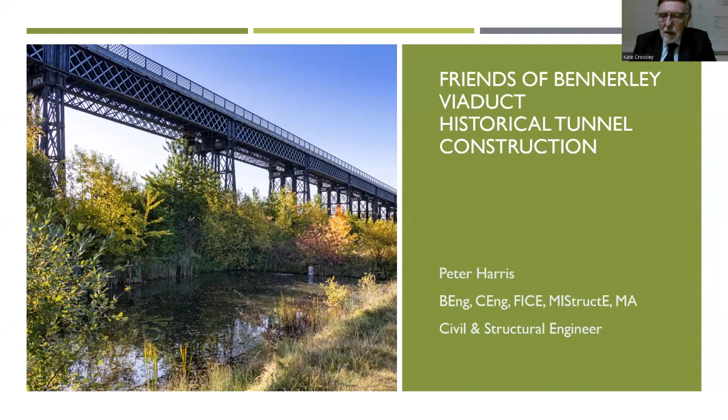What I was going to talk about tonight is historical tunnel construction. Basically, how tunnels were built in that period from about 1780 with the canals right through to about 1890. And the topics I'm going to cover are how they sank the shafts, how they constructed headings between the shafts and along the line of the tunnel, then how they constructed the main tunnel itself, and finally talk about some construction features.

The sources I've used in putting this together are Frederick Simms' Practical Tunnelling, written in 1845 and then upgraded in the third edition 1896, and that's where most of the illustrations that I'm going to use tonight come from. I'm also going to make reference to a couple of comments by Charles Gripper in his Railway Tunnelling in Heavy Ground, written in 1879, just after these tunnels were completed.

And also a couple of references to Thomas Walker, who built the Severn Tunnel, its construction and difficulties, 1872 to 1887. And I'll also be using some references from the Forgotten Relics website run by my friend Graham Bickerdike.

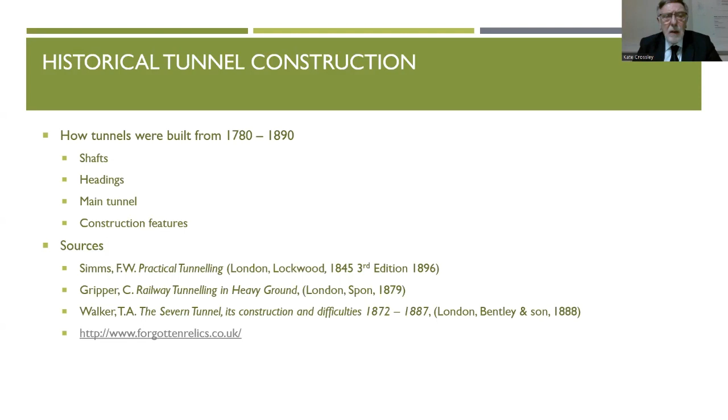So firstly, let's have a little bit of a general overview about the line in general. The Derbyshire and Staffordshire Extension Railway, which ran from Egginton Junction through Etwall, Mickleover, into Derby Friargate, and then out again through Breadsall, West Hallam, Ilkeston, Bennerley Viaduct, through Kimberley, and eventually on to Gedling and Nottingham

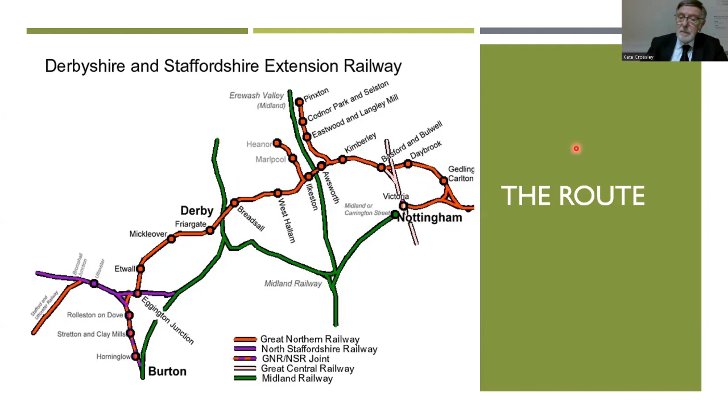itself. And there are 4 tunnels on the line, one at Mickleover, which we'll talk about, one at Morley, just the other side of Breadsall, Watnall Tunnel near Kimberley, and finally the big tunnel at Gedling, the Mapperley Tunnel. I'm going to use those initially as illustrations for some of the things that we're going to talk about.

Firstly, Morley Tunnel, very short tunnel. It's only 238 yards long. Picture on the right shows it before it was infilled. It's now completely buried, although the Greenway cycle track, which will eventually connect to Bennerley Viaduct, does run over the tunnel. It's a very short tunnel, 238 yards. So you could theoretically and almost certainly drive this from the 2 ends.

That would enable you to have basically 1 shift of miners to do the excavation and 1 shift of bricklayers to lay the bricks to form the tunnel, and they would alternate from one end to the other. You just have two faces, 1 at each end. So that would be a very simple tunnel to construct.

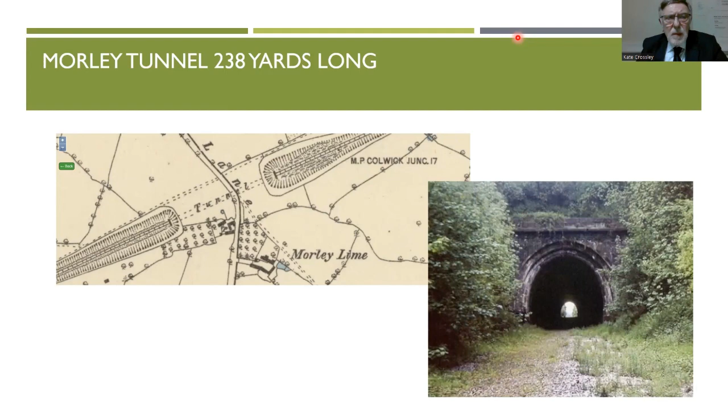Then if we look at Watnall, Watnall is slightly longer, just 288 yards. The picture on the right again shows it in its very deep rock cutting. You can see that both in the plan. This is the 1880 Ordnance Survey plan showing the rock cut in each side. And the tunnel again, sadly, has now been infilled. And again, at 288 yards, it's on the limit of the sort of thing where you'd want to build it working in from the 2 ends with just 2 faces.

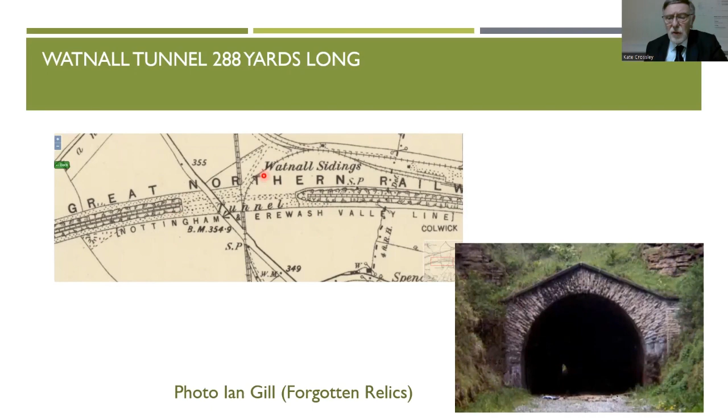But the next one is the big one, Mapperley Tunnel, 1,132 yards long. At that, it's the 22nd longest tunnel in Britain. There are roughly 700 abandoned tunnels and roughly 700 tunnels still in use. So this was built with 6 shafts. In order to build a tunnel economically, once it's over about 200 to 300 yards long, you need to have more faces. Now this one had originally 6 shafts. 3 of these have been filled in and 3 of them are left open.

And we can see the open ones here. If you can see where my laser pointer is, there's an air shaft. That's one of the construction shafts. That's another one, and that's another. And there were 3 others. Now, where those 3 are isn't quite clear, but if you look around the shaft, you can see these mounds. This is the spoil which was excavated from the tunnel, which was just deposited as close as possible to the shaft. So there's a mound just there. So I suspect there was another shaft there.

There's a mounded area just behind the portal here. So I think there'll be another shaft there and possibly another one in the middle of that field. 6 shafts. So 3 of them have been filled in, 3 left open. That would enable you to have 14 faces to work from, and then you'd have in effect 7 teams of miners excavating at one end, 7 teams of bricklayers working at the other, and they would alternate from one position to another, and that would be the economic way of building a tunnel as long as this.

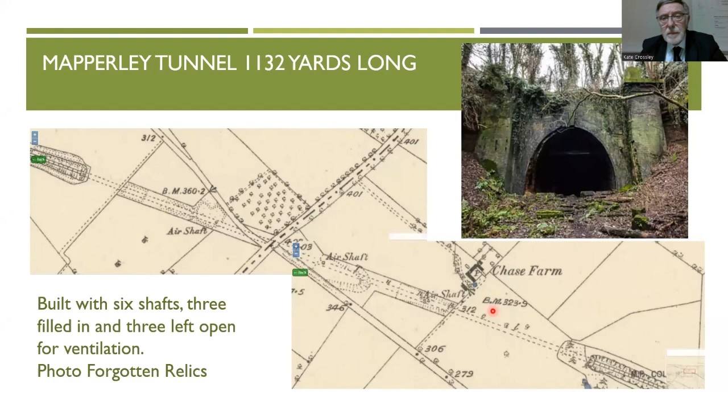Interestingly, the next one is Mickleover Tunnel, which is a bit odd because it's 464 yards long, which is too long to build without shafts. And yet here we see on the 1880 map, just literally 2 years after the tunnel was built, you've got the cutting at one end, the cutting at the other, and the curved tunnel. That in itself presents some engineering challenges to build a tunnel on a curve. And there's no sign of any shafts whatsoever. For a tunnel this long, I would expect at least one, possibly two.

So I consulted my friend Graham Bickerdike, and he came up with the newspaper report. So there was at least one shaft. We don't know where it is. I suspect it was probably in the middle. And although there's no spoil mound there to show where the waste was tipped, it may well be that the landowner who arranged for access to this probably insisted that all the waste was moved, or indeed perhaps the waste was taken away and used as part of all the works on the line. However, we do know there was at least one shaft.

And the sad reason we know that is because on the 6th of December 1878, Thomas Smith, one of the labourers, came up the shaft at 6 p.m., which would be in the dark, got to the top of the shaft and was ready to go home, and unfortunately he misstepped and fell down the shaft, broke both legs, broke his back, and sadly died in hospital 8 days later.

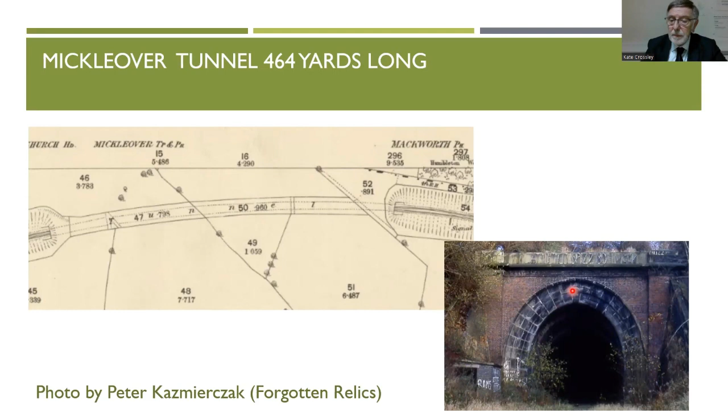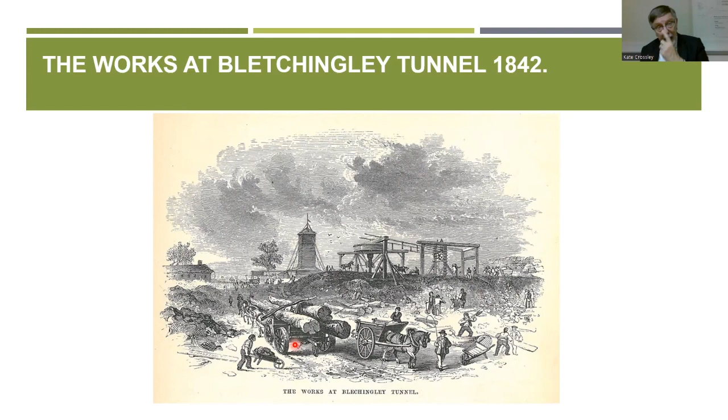In the centre there is this timber tower, and that's a sighting tower, and we'll talk about that in a few minutes. That was used to set out the line of the tunnel. And in the foreground, there is this horse and cart with 3 enormous tree trunks on it. And again, they're timbers that are going to be used in the construction of the tunnel, and we'll be talking about them as we go along.

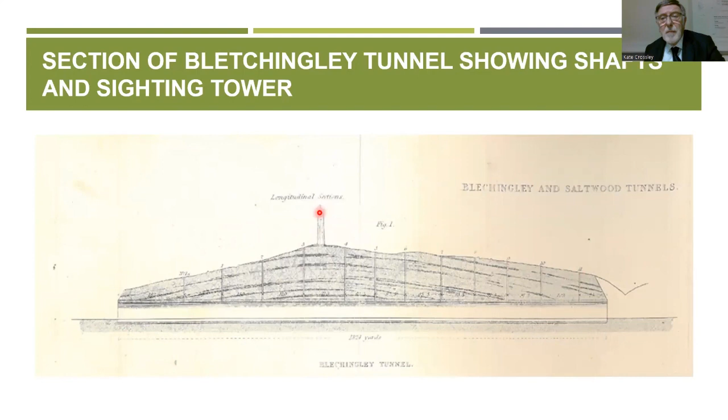So, as I said earlier, you could construct a tunnel from two ends. You'd have 2 working faces, one being excavated and one being bricked up. Okay for short tunnels. This is Bletchingley Tunnel, and this has 12 shafts. So theoretically, you'd get 26 working faces, and you'd have 13 sets of miners and 13 sets of bricklayers to make this economical. On the top there, you can see the sighting tower, and we'll look at how that works.

So a sighting tower usually is a timber construction around a brick or stone core for stability, and the timber structure is to keep the wind off the instrument. In the top of the tower there's an instrument called a theodolite. This one, it can rotate. It's a fixed type of theodolite. It can rotate through 180 degrees and turn over. The photograph there is one in the Science Museum in London.

On the right-hand side, the photograph there is a stone masonry sighting tower. It's the only one of its kind that we know of in existence. This is at Bramhope Tunnel up in Yorkshire. And again, you can see the large slot in the top of the tower through which the theodolite would be rotating.

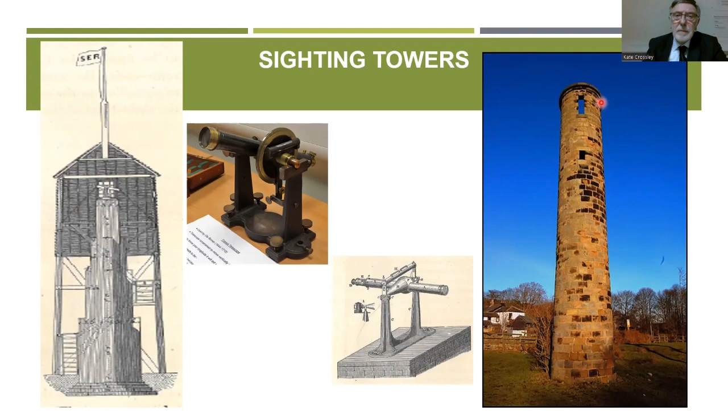So from the sighting tower, you would look firstly in one direction along the line of the tunnel, along the line of where the railway was going to be, and then you would look the other way by rotating the theodolite through 180 degrees. But then you would also be able to sight downwards intermittently to other places on the ground, and you would be able to decide exactly where the shafts needed to be in order to set the tunnel out.

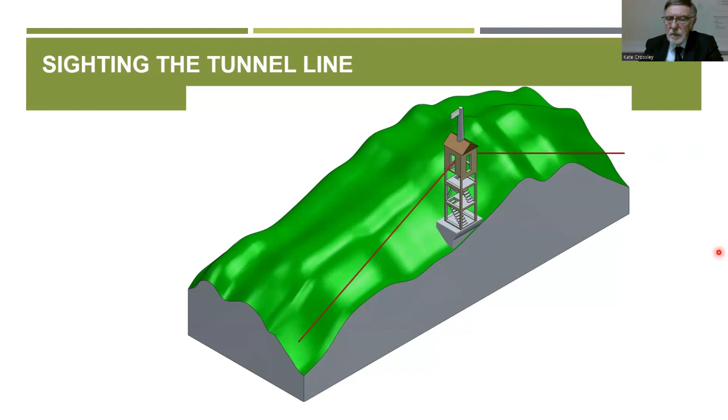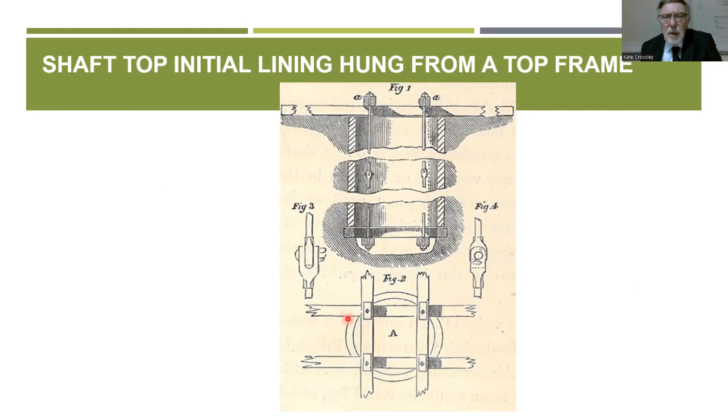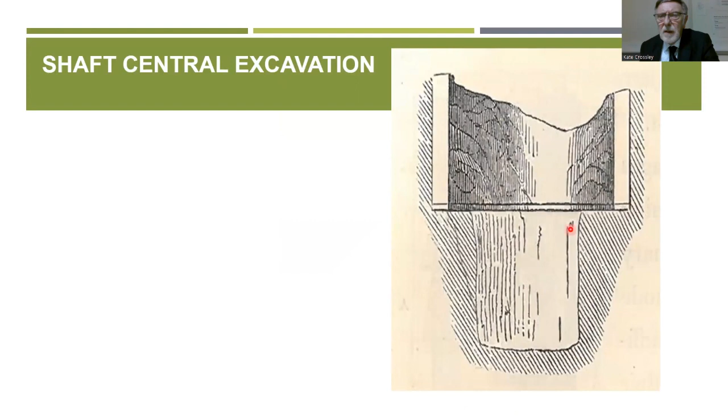Each time you excavated down, you would put the timber crib at the bottom and build the brickwork back up, progressively getting deeper and deeper. In this illustration here, you can see the brickwork's been completed. There's a timber crib in place, and they're excavating down the middle of the shaft to create a void. Once you've done that, you'll progressively work outwards, and you'll probably have to put props in to hold the crib back up, and you would probably build the brickwork in panels.

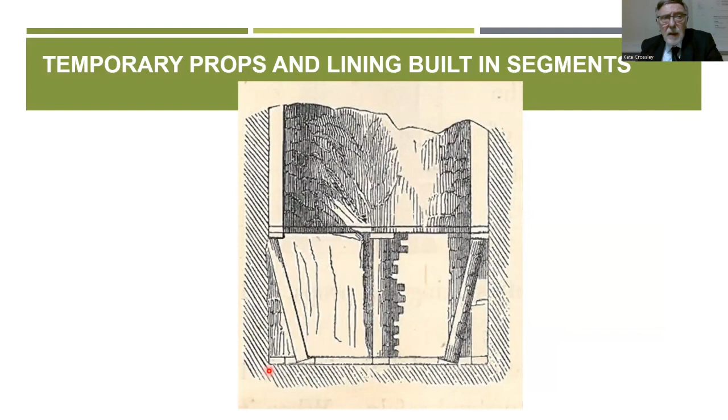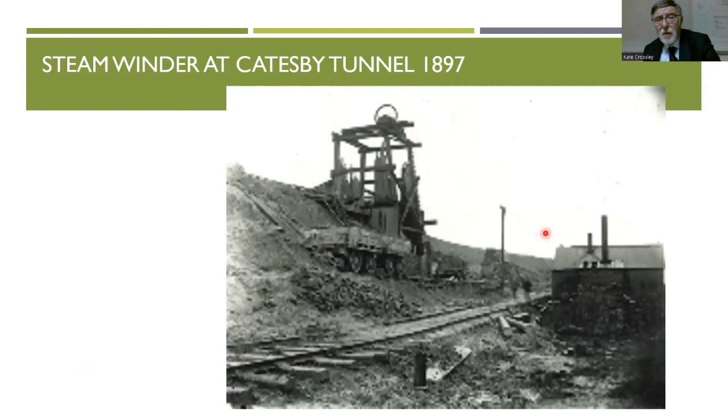This is a steam winder at Catesby Tunnel in 1897. On the right, you've got a little engine house, and on the left, you've got the actual shaft headgear with its pulley wheel over the top. They've put a temporary railway along the side, and as you can see, the ground is being built up around the headgear there. As progressively they're excavating more material, they're just literally dropping it each side and created a waste mound.

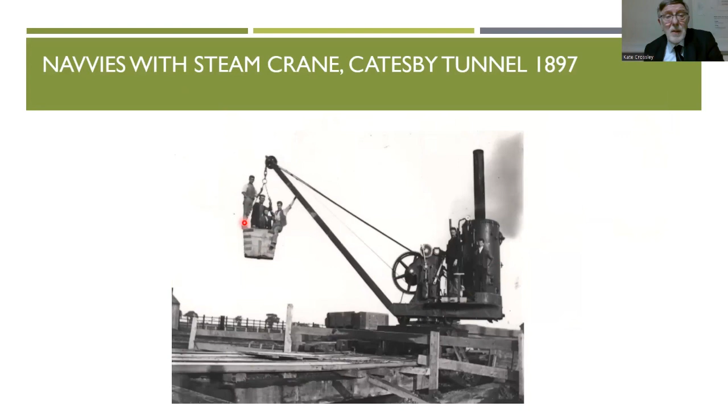This is also from Catesby in 1897. This is a little steam crane. So rather than have a horse gin or a steam winder, they've actually got a crane. And as you can see, there's two men on the crane operating it. And there's the kibble bucket that's to go down the shaft, and four of the miners on the bucket. And again, just think of the health and safety implications of that. One's sitting on the edge of the bucket, and the other one's actually standing on it. Things were quite different in those days.

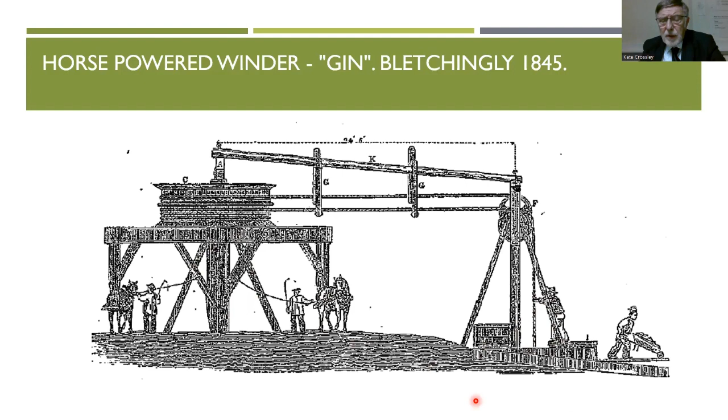But again, you can see on the shaft there's a platform on the top, and the banksman there is just guiding the rope down the shaft and probably signalling to the horse holders when to stop and get the bucket correctly at the bottom of the shaft. And in this illustration, you can see the brickwork for the shaft is progressing downwards.

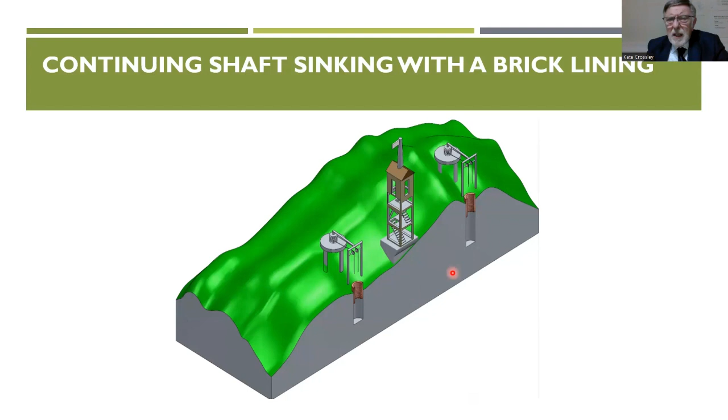Most shafts at this time, construction shafts and ventilation shafts, were about 9 foot or 10 foot in diameter. Brunel, on some of his tunnels down at, say, Sapperton, used alternating 10 foot and 20 foot diameter shafts. He was quite keen on using big shafts, and certainly the Stephensons used some larger shafts, but they went out of fashion very quickly, and 9 and 10 foot was a sort of standard diameter.

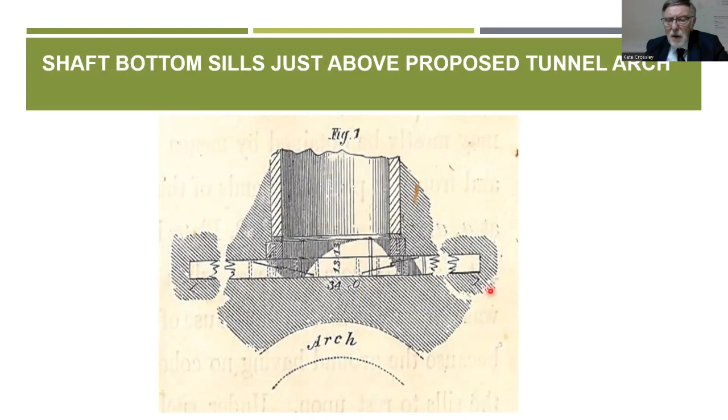Eventually you can only go so far down. In the bottom of this illustration, there's the little arch, and that's where the actual brick tunnel is going to be eventually. So you can't take your brick shaft all the way down at this stage. So you would stop and put a timber crib in, and then you would excavate 4 small tunnels, about 18 inches in size, very tiny tunnels that somebody's going to have to crawl into, excavate out, and put these large 13-inch timber pieces in, thread them in, push them in with a scarf joint, a central piece, and another piece the other side. And this would be a few feet above where the real tunnel is going to be. In plan, you've got 2 long sections and 2 short sections, and this temporarily supports the brickwork.

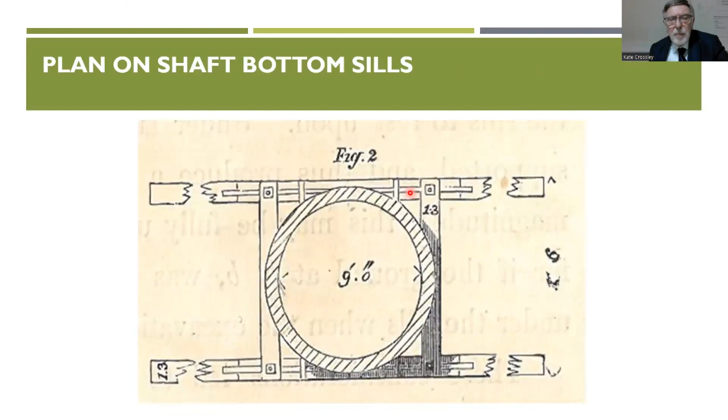Once you'd got the shaft, the timber part of the shaft down to the bottom, you would use a theodolite or your sighting tower to mark on a timber frame the actual centre line of the shaft at that point. And you would hang wires down the shaft with a large plumb bob on the end. Plumb bobs would sometimes be hung into a bucket of oil or slurry in order to stabilize them. But once they were down there, that would give you accurately the line of where the tunnel was going to be.

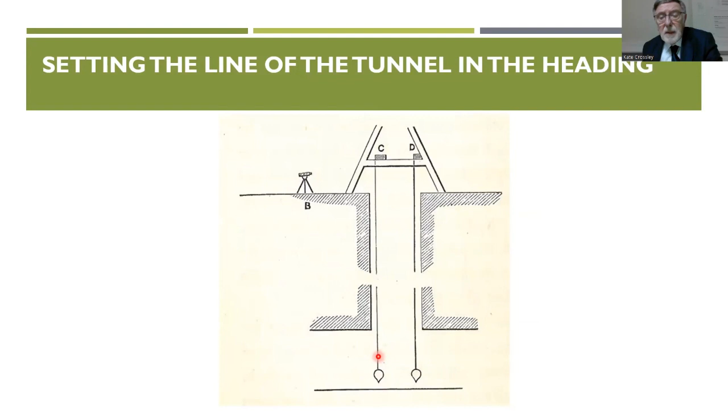The miners would then excavate this timber heading with posts and boards progressively, and at the face, they would hang a candle from the centre line of the timber heading, and then they would be able to sight back to the shaft, to those wires, to make sure that the line of the tunnel was correct.

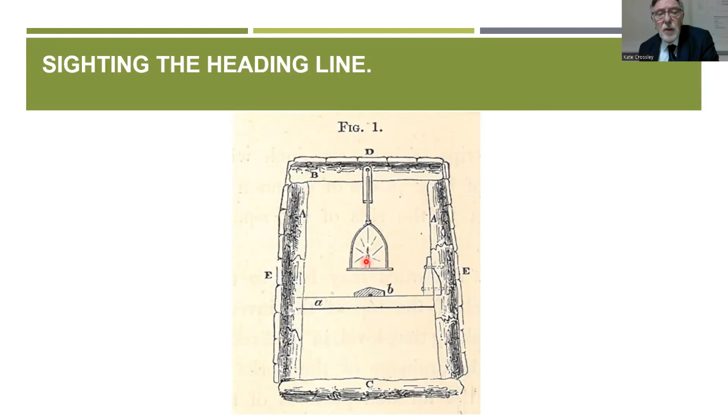And this small size of construction, probably 5-6 foot high, 3 or 4 foot wide, was typical of the 1840s. But one thing we do know is that progressively during the Victorian period, headings did get significantly bigger. And by the time of our tunnels, they would probably be 6 or 8 foot high and possibly 8 or 10 foot wide.

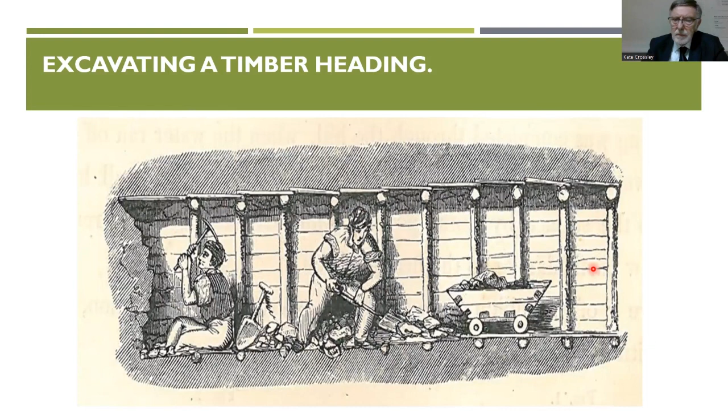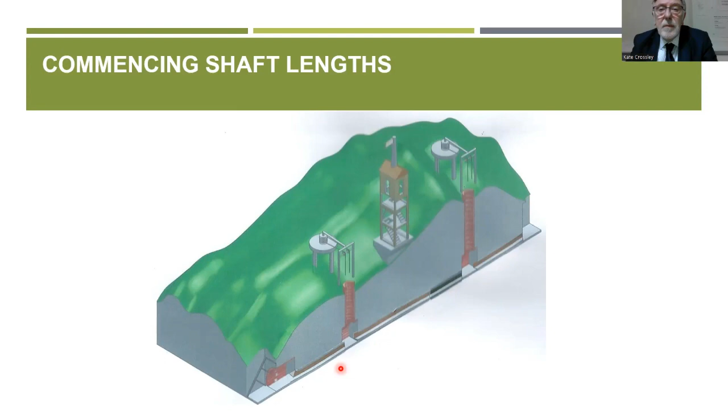And then in this illustration, with the brickwork right down to just the top of the shaft, we'll then start excavating out left and right from each shaft, and also in from the portals. So in this one with 2 shafts, we've got 6 working faces and 3 teams of miners, 3 teams of bricklayers.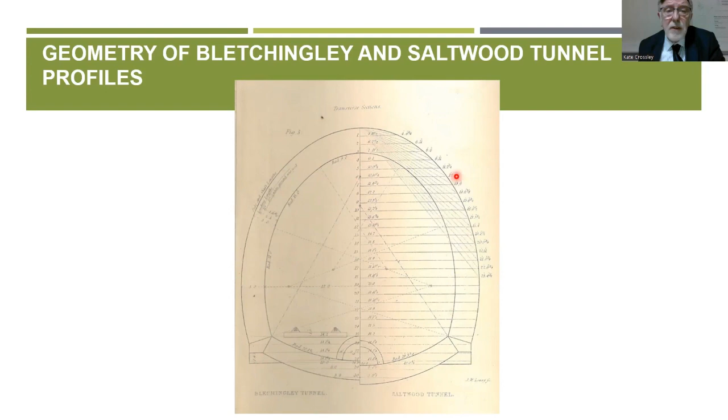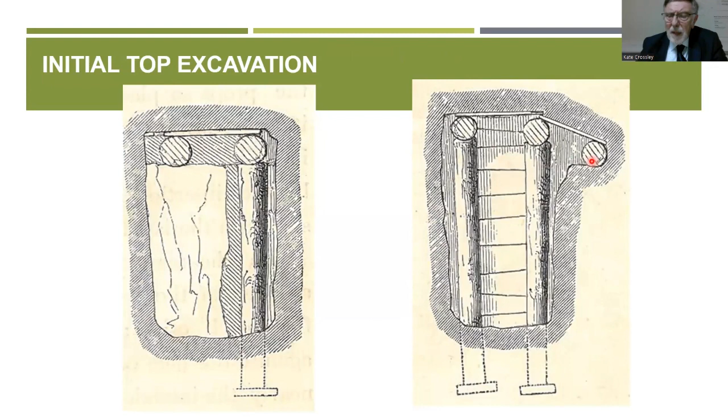So you're going to start at the top of the crown, excavate a very tiny heading, and install 2 of those large timber tree trunks that we saw earlier, and board over the top of it and put a prop in. Once you've done that, you'll then extend to the side, put another tree trunk and another prop, and excavate further to the side, progressively making the excavation wider and wider.

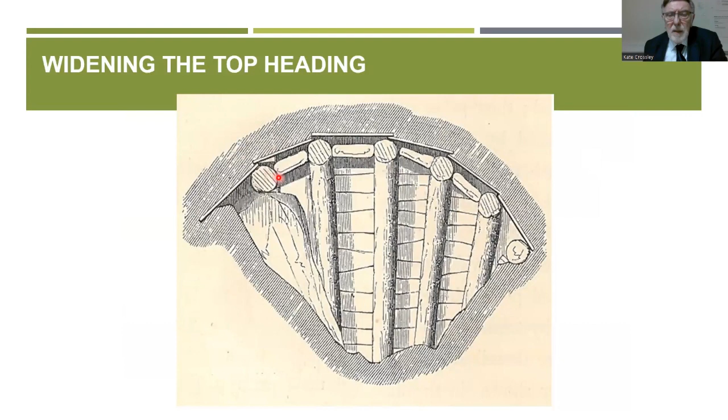And here we are with a lot of the crown bars in, and the tunnel's getting wider, and you're getting more and more props. And that's how the miner would be working, using either a clay spade or a shovel, and progressively banging in timbers to support the sides and keep the ground stable.

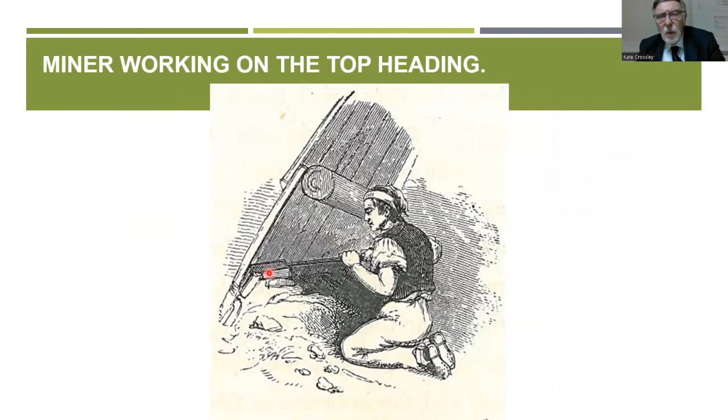Pretty hard work, particularly when in this early phase at the top. Now I have to apologise for this because I haven't got a slide that shows this correctly. This is how they would actually be working away at the top and working away from the shaft. This is a few weeks later when they've actually got some of the tunnel in place, but it shows the general procedure. That you've got these large tree trunks.

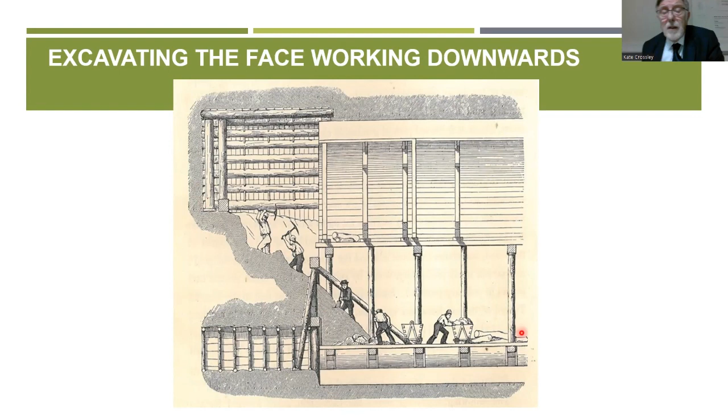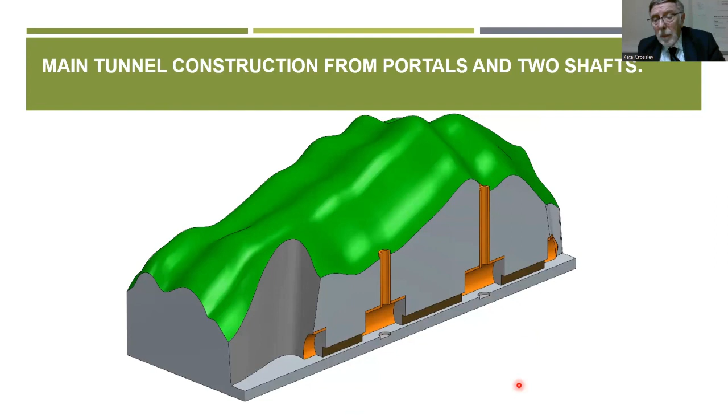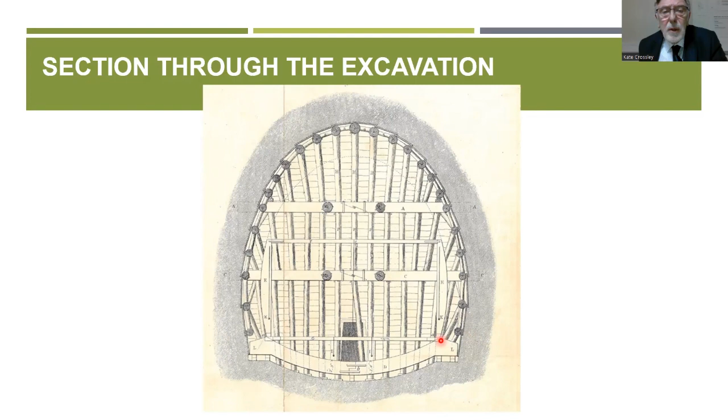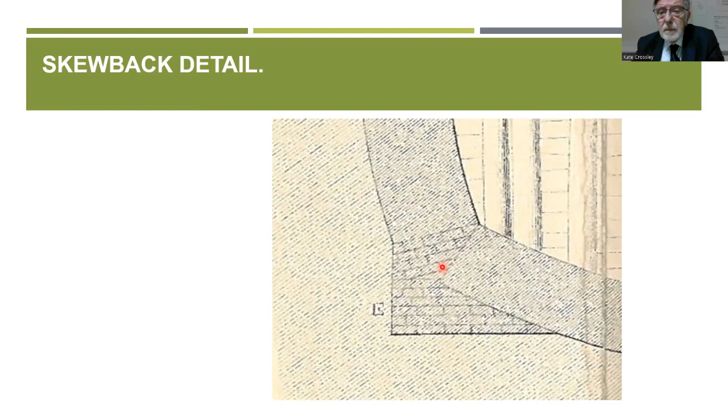And these bricks were actually laid dry in a box above ground level, and they were actually cut with a saw to that profile, and same with the top part. So they came down as a kit for the bricklayers, already cut and shaped to work. This is an illustration of when the skew backs, the invert, and the arch have been built. This one is probably in quite good ground. You've not got so many big timbers supporting the roof of the ground, and you've got little brick piers that have been built in between them.

And this shows the face of the heading, and then they put these 4 vertical posts in, and they've built a frame. So the bricklayers can lay the sidewalls quite easily because they're not far off vertical, so they can just lay the bricks as they go. But once you get into the haunch and the crown area, you've got to have the bricks supported. So they've got these centering frames up here, and then they've got laggings between them. That's that dark line. And basically they put a lagging in, lay some bricks, put some more laggings in, lay some more bricks overhand into the back, and progressively putting more and more laggings in and laying bricks.

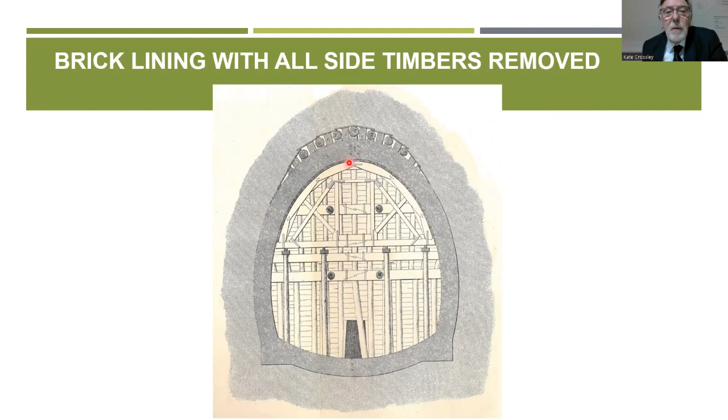And within your gang of bricklayers, you'll have one gang doing one side and one gang doing the other. They were all employed as lump labour by a man called a butty man, and he would have a team of maybe 6 or 8 bricklayers, 3 or 4 working one side, 3 or 4 working the other. Problem comes when you get to the crown right up here, because progressively you're getting less and less space. This is a similar illustration of a tunnel in very, very soft ground, and you've got the whole thing lined out with the big pieces of timber. Now, I should have said earlier about how far we're going to work.

They refer to working a face in lengths. That's how far the miners are going to excavate before the bricklayers go in. Now, that length is variable. It depends on how good the ground actually is, and typical values are 8 foot up to about 17 or 18 feet.

If the ground is good, you'll have a long length, and if the ground's not so good, you'll have a short one. At Highbull Road Tunnel in Mickleover, that was all done in 8 foot lengths because it was excavated through sand, so it was difficult to support. And this is where Gripper's comment about heavy ground comes in.

They're not saying that piece of ground is any heavier than any other. In our terms now, we refer to it as either loose ground or good ground or semi-rock. But in those days, working in sand and loose clays, they would refer to that as being heavy ground, and the actual rate of advance would be very much shorter.

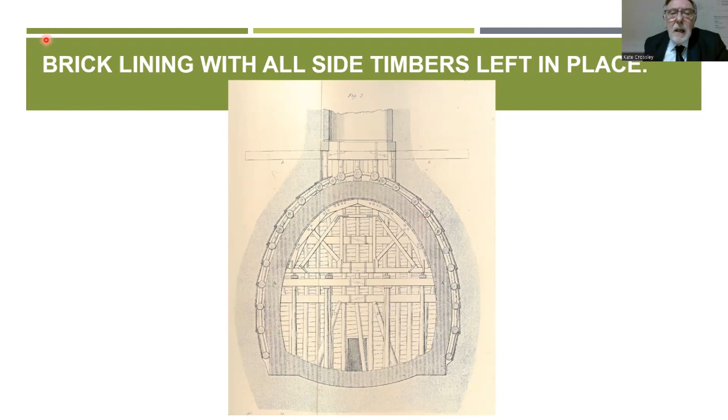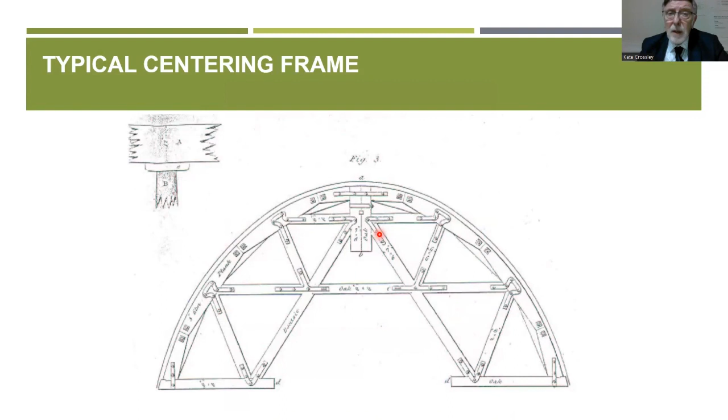Again, this is the centering in place, and this is a typical centering detail. They're timber frames, they're pre-made. You would need 3 or 4 per length of tunnel you are going to build. They all come as a kit, and they're bolted together on site. You put them in, build the brickwork, and when the brickwork is set, you take them out and move them on to the next piece of work, take them back up the shaft, move them to somewhere else.

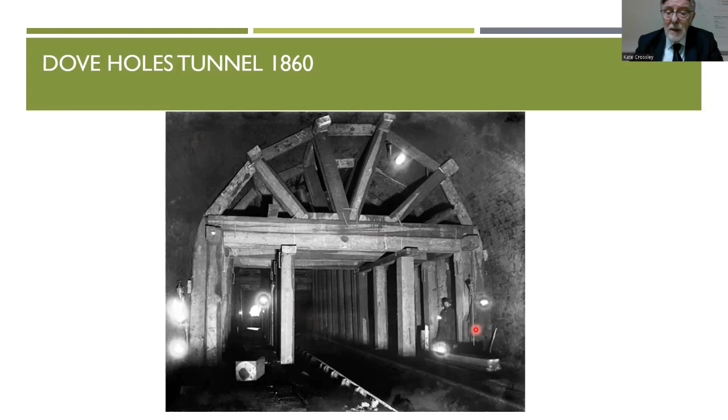This is a frame in Dove Holes Tunnel in 1860, and in some cases it has been said this is the centering for the tunnel. Well, it's not actually. It's a temporary frame put in as centering for a repair to the tunnel. This was a twin track tunnel. In order to repair the brickwork at some date in the 1860s, they've put a single track down the middle, and this frame was to support the brickwork and the new replacement brickwork.

Different parts of the country had different traditions. In the south and in a lot of tunnels, the bricks are laid as 4-inch rings individually. In the side walls, you'd be able to bond them because they're not far off vertical. Once you get round the arches, you have to do them in single rings. But in the north of England, particularly around the Manchester area, there was a tradition of building 9-inch rings rather than 4-inch, and having them bonded and having separate 9-inch rings.

And here you can see at Clifton Hall Tunnel, built in 1850, 3 9-inch rings of brickwork, and intermittently there are cross-bonded areas called vertical bonding. You can also see the timbers that form the excavation are left in place, and there's little brick piers in there, and it says rubble filling. And of course, this is where the big round timbers would be, and they've been dragged forward. I'll talk about that in a minute.

I don't believe that at Clifton Hall any of this rubble packing was got in place. I think it would be extremely difficult to do. Sadly, in 1953, one of the infilled shafts and the void around it collapsed. In the 1940s, they had built a housing estate over the top, and 3 houses collapsed into the tunnel and 5 people were killed.

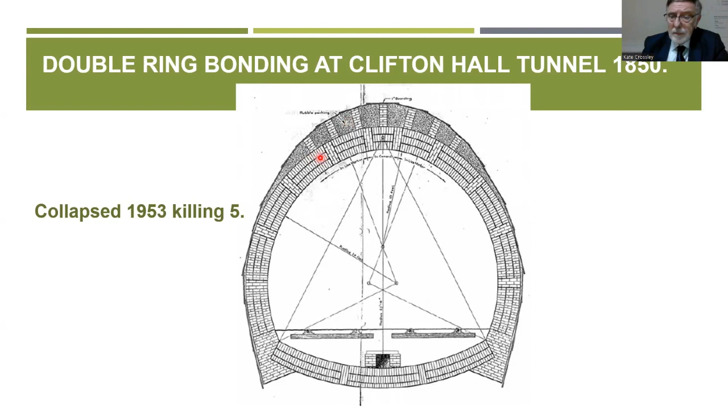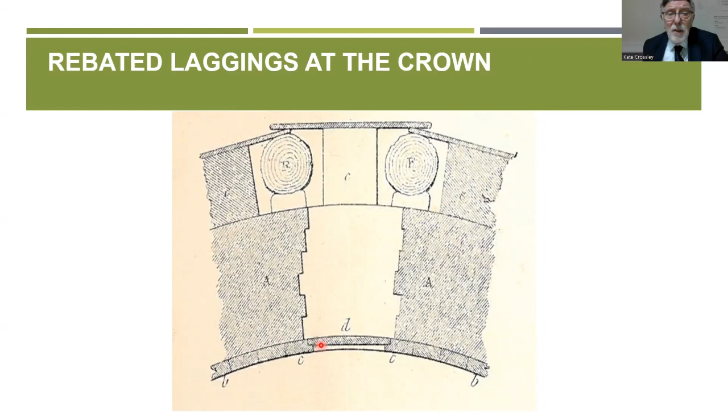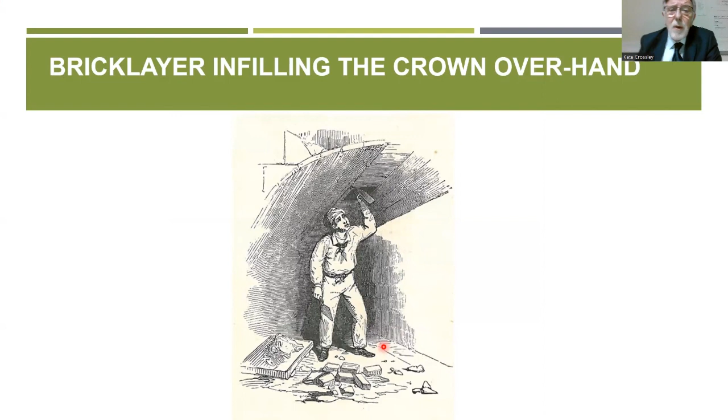But back to the brickwork, the final part is actually closing the crown. You're still going to have those big timbers in there, and this width that you've got to fill with brickwork is getting smaller and smaller. So you can't have 3 or 4 bricklayers working on each side. It becomes a one-man job, and he basically has some little cross timbers to put in to fill that void. He's got to lay the bricks above himself overhand, which is a very tedious task, a lot of hard work. So he gets paid more than the other bricklayers laying the sidewalls and the arches.

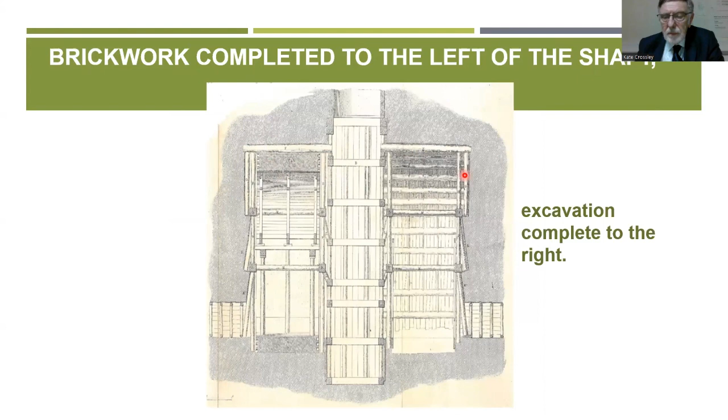So in this illustration here, you've still got the timber square shaft in place, and you're building the brickwork and excavation to the left, and you've excavated to the right. Eventually, you get the brickwork in both sides. You can see the centering frames there and there. Eventually, you can take those out and fill in this shaft length, the bit in the middle.

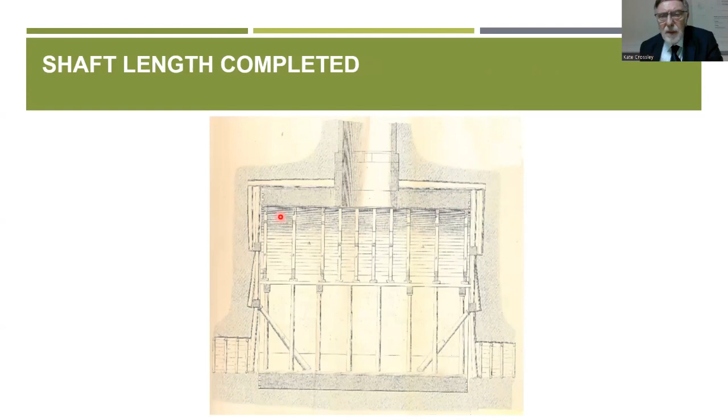There you've got the centering frames in the middle, and you've finally formed the brickwork at the bottom of the shaft. This is called a shaft eye, and we'll talk a little bit more about that later. But you can see the form of the excavation, and then you're going to progress left and right from there.

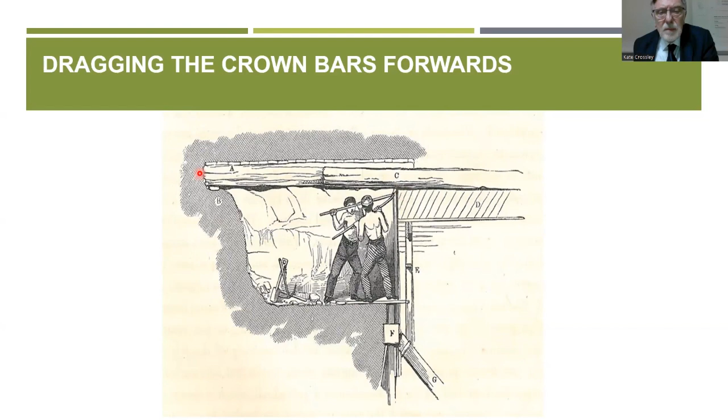Again, you're going to do a small top heading, and you're going to drag those timbers forwards. You'll be using pinch bars to catch into those timber tree trunks, and you'll drag them into the top of your new excavation progressively, one after the other. And that's pretty hard and dangerous work.

That's the illustration we used before. You're working away from the shaft, progressively doing the top, doing the middle, putting raking props in, and those props notch into the brick invert there.

Just checking. Yeah.

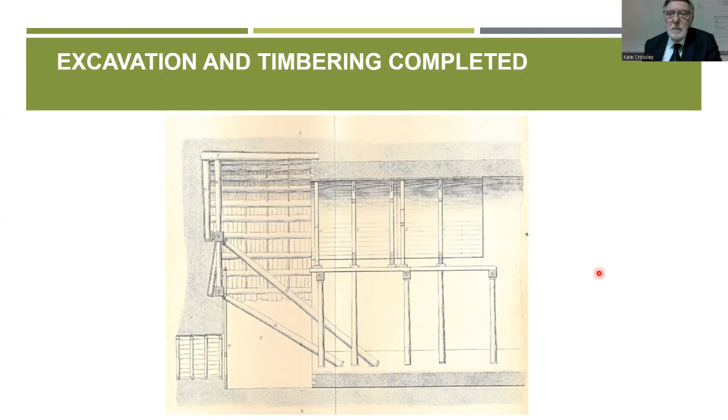So eventually you get the brickwork completed and you move on to the next section progressively, working away from the shafts. From about the 1850s, 1860s, and certainly later on, they moved away from working from the shafts. I think this was possibly as a result of a collapse at Watford Tunnel. And they went for breakups instead. So rather than excavate away from the shaft, they would leave that material in place, and they would go along the timber adit, and they would form a breakup and work out from there. And this actually is another way of getting even more faces to work.

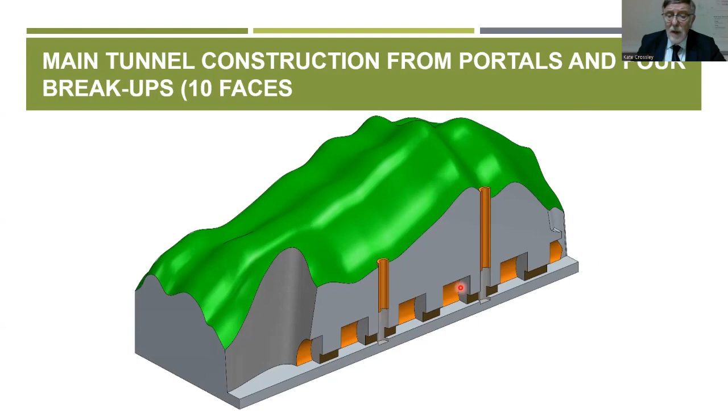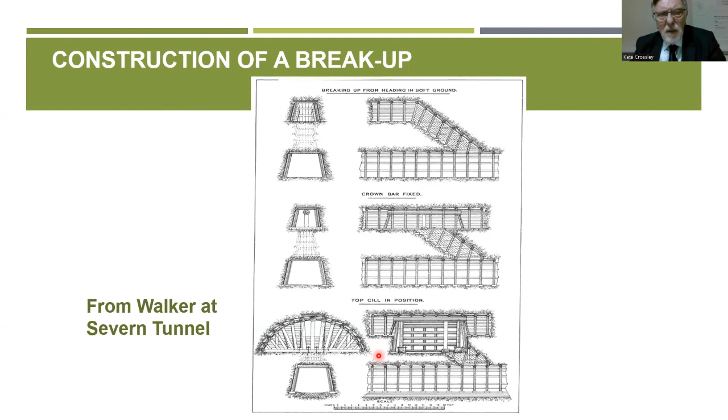And then they would work left and right as before, progressively putting more timbers in and supporting the ground until eventually they could form the whole profile. And the use of a breakup did enable them to build tunnels somewhat faster. Eventually, we've got the tunnel completed. We've got the shafts all bricked up. We've got the brick lining all the way through, and we're going to build the portals and head walls at the ends.

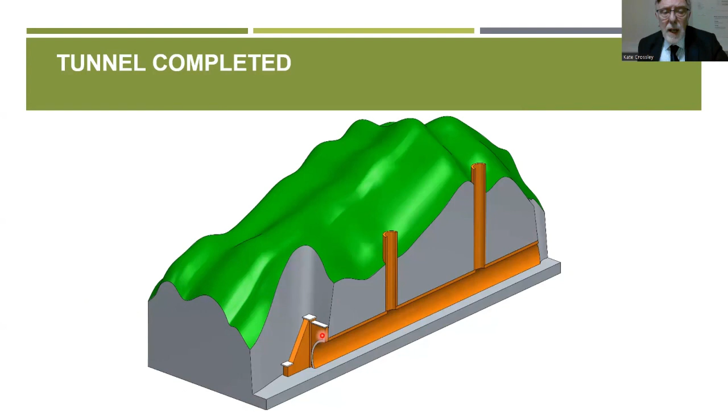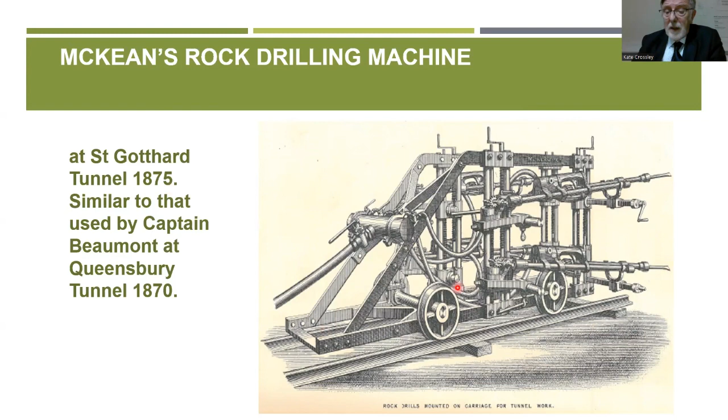That was one of the first rock tunnels in England, using technology developed in the mining industry. And basically this is a rail mounted compressed air rock drill with 4 rock drills on the front, and they would drill into the rock, put in a charge of black powder, or later they would use tonite or dynamite, and they would actually blow the face and excavate the material. And this is possibly used at Watnall and that rock excavation there.

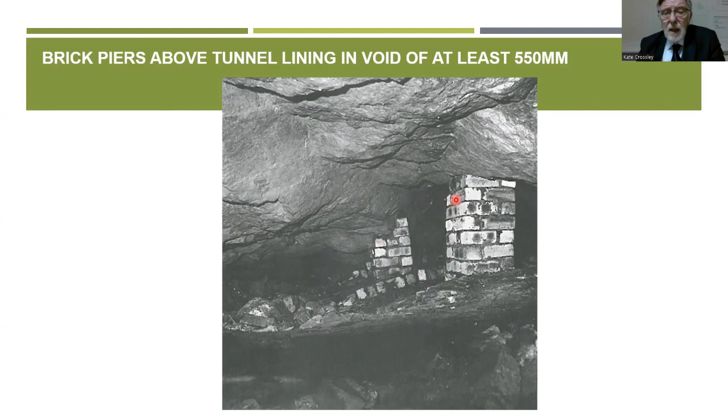Of course, if you're doing a rock excavation, it's a bit hit and miss with black powder or other explosives, and you tend to get a lot of overbreak. Now, it's not easy to see it, but that curved piece of brickwork there, that's actually the outside of the tunnel lining. The tunnel is below here. That's the crown of the tunnel. And you've got these voids above, and rather than fill the voids and pack them as they perhaps should have done, they've just built these little brick piers to hold the rock up. Very hit and miss. And there's certainly evidence that occurs at Queensbury Tunnel.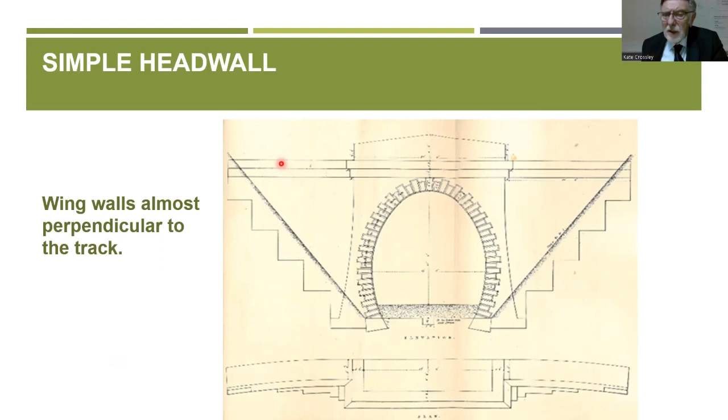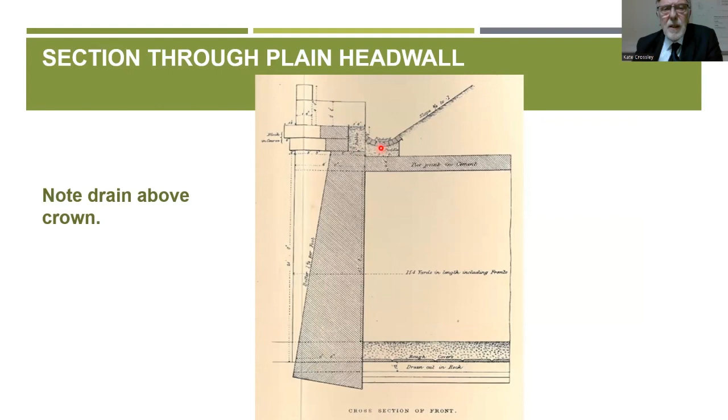And that's a typical section through a head wall. You've got the ornate brickwork there, the solid brickwork, and the invert roof of the tunnel, and the slope of the ground above, and the drain at the top there. We've had a lot of problems with these drains getting full of debris over 100 years and then leaking into the tunnel.

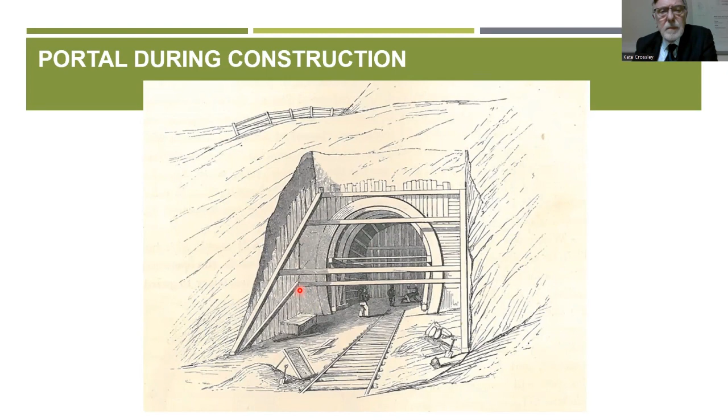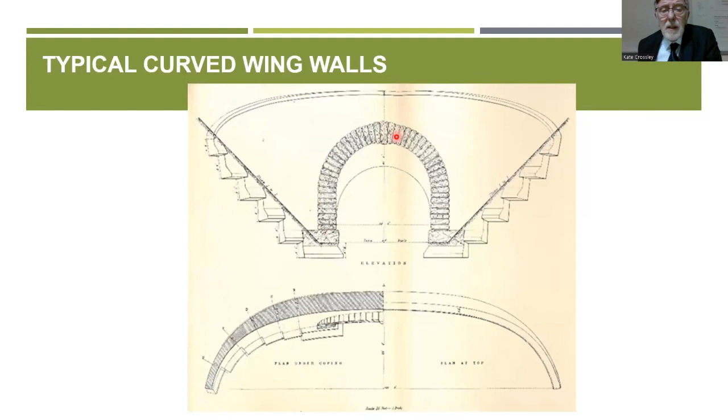I'm showing this one because it's one of Brunel's, and it's typical of the Great Western, a much wider tunnel and a very ornate ragged stone voussoirs, and really nice curved wing walls, quite complicated to construct, and they're stepped up the slope. But what's interesting here is that this inner line is the actual tunnel. And basically, at the portal, they've created a bell mouth. They've raised the tunnel crown up and created a larger void there. And I'll show this in the next slide.

So on the right, that's the main standard tunnel profile, 20 foot or so, 20'6" high. And that's the tunnel brickwork. And they've created this funnel-shaped bell mouth at the portal. Now, at the time Brunel was building this, the trains were doing 30 to 40, maybe even 50 miles per hour. But it shows that they were concerned about the change in air pressure inside the carriages as they went through. And they thought there would be a shock of pressure as one of their trains entered the tunnel. Obviously, this was a complete fallacy. At those sort of speeds, it didn't happen at all.

But interestingly now, as we're building modern tunnels, we are creating bell mouths for the same thing. But of course, our trains are traveling at 120 or 200 miles per hour, and we really do get a shock wave when a train bursts into the tunnel, or also in the opposite direction as well, sucking air out of the tunnel. So this was a feature that Brunel used misguidedly at the time.

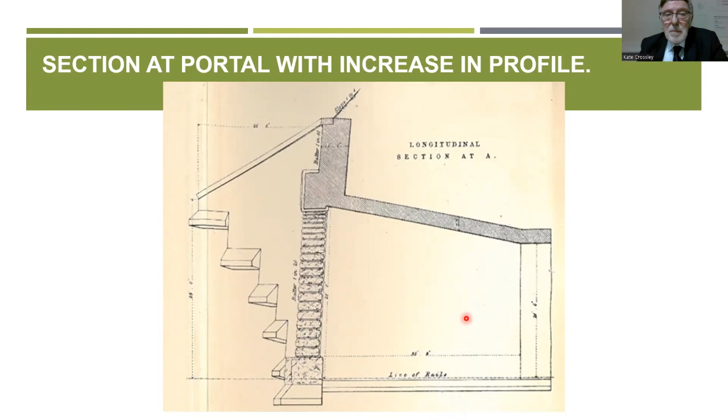And this is a sort of typical pepper pot tower you get on the shafts that are left open for ventilation, and quite a nice tower, slightly tapered, cornice around it, and a cast and wrought iron grill over the top of it. And you still see some of these. There are a few still left in existence up and down the country. Very often they got taken off, sometimes because they corroded and replaced, and sometimes removed by vandals on abandoned tunnels.

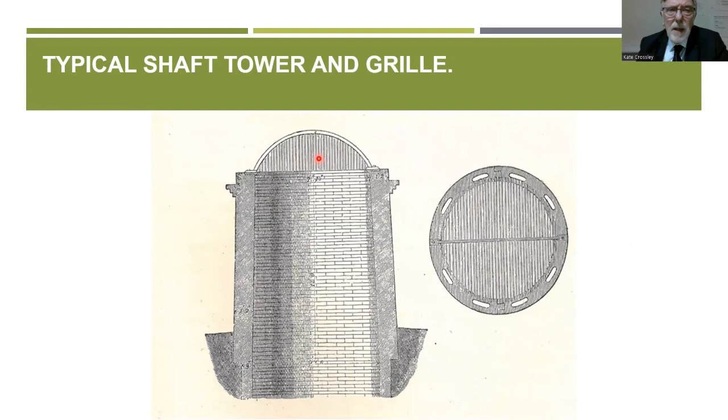I talked about the cast iron, the eye, where the shaft and the main tunnel intersect. And this is a cast iron curb or shaft eye used by Stephenson's. So in the middle, you've got a circular in plan. Above and below, you've got the elevations, and to the side, you've got the elevation looking left and right. So these were 4-part cast iron castings made in a forge and then delivered to site in 4 pieces. Lifted into the top of the tunnel and then bolted into place.

Now, it's a typical Stephenson detail from the 1830s, 1840s. Sevenoaks Tunnel has quite a few. Clay Cross has them exclusively. Summit Tunnel. Shildon was one of the first ones. I've been in there, and the casting quality was atrocious. And Watford Fast. They must have been extremely difficult to get into place, to lift them up and get them into and build the brickwork around them. And I suspect that when they had the big collapse at Watford Fast, one of the shafts actually collapsed. And that was when they were trying to get this curb into place.

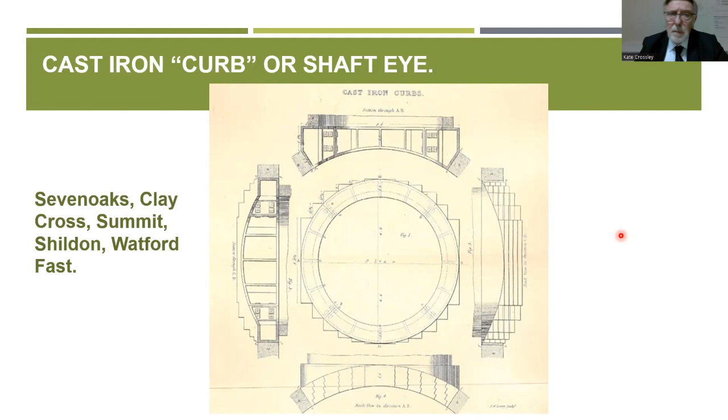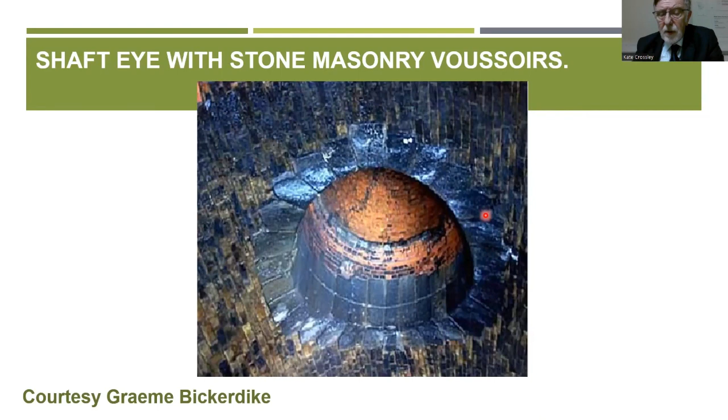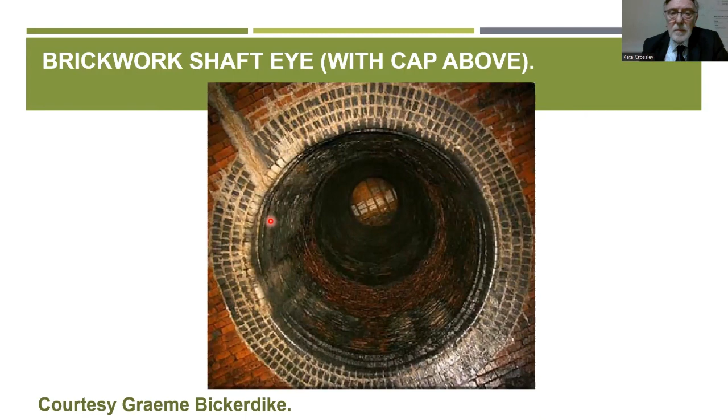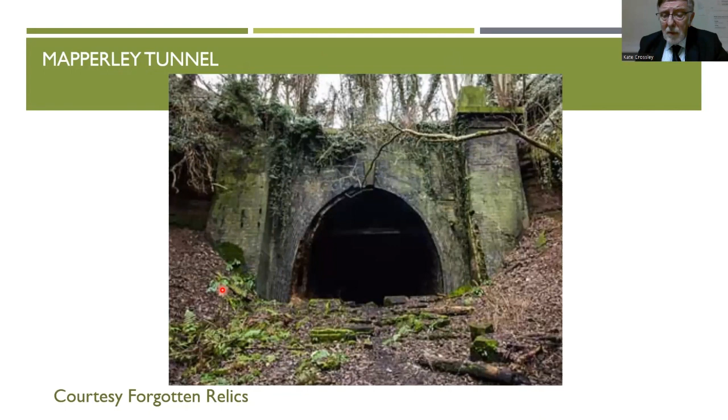So almost in conclusion now, looking at Mapperley Tunnel, this is the unclosed portal at Mapperley. The other end is buried. As I said, it was the longest tunnel built on the line. You can't get access in there now. And 3 of the shafts were filled and 3 of them were left open.

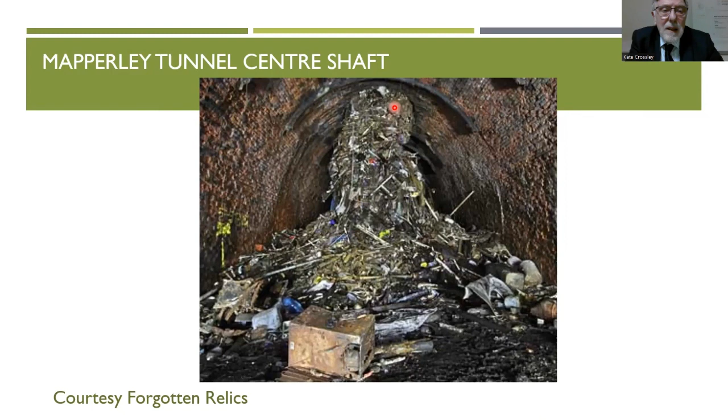But anyway, finally, that's the end of the talk. And thank you. Any questions?